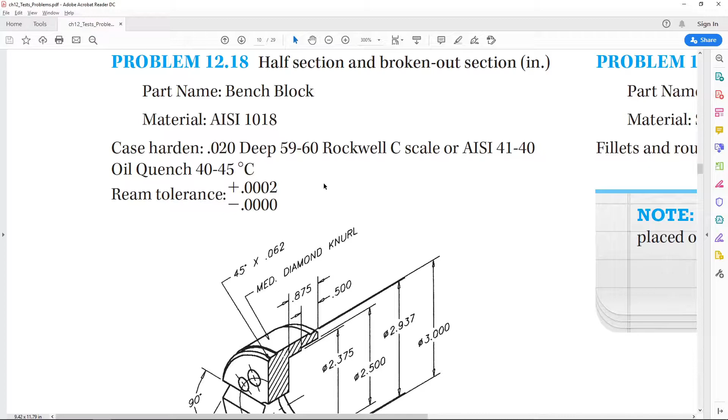For our next assignment, let's do problem 12.18, this bench block. It shows it as a half section and broken out section, but frankly, I think a half section is going to be totally fine for this.

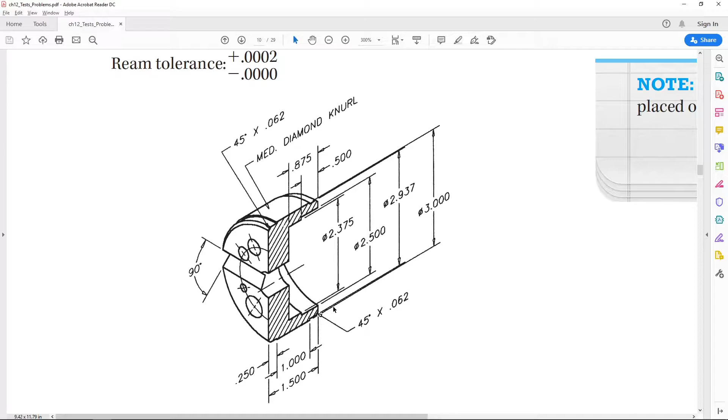So this shows you the details in two views, the front view and an isometric view. I think it'd be best, well, you can do it in 2D, or you can make this section shape and revolve it, and then cut out the holes and this 90-degree angle through the center. Here are all the holes and their diameters and the width of that 90-degree angle that's cut through the center. As far as making it goes, here it is.

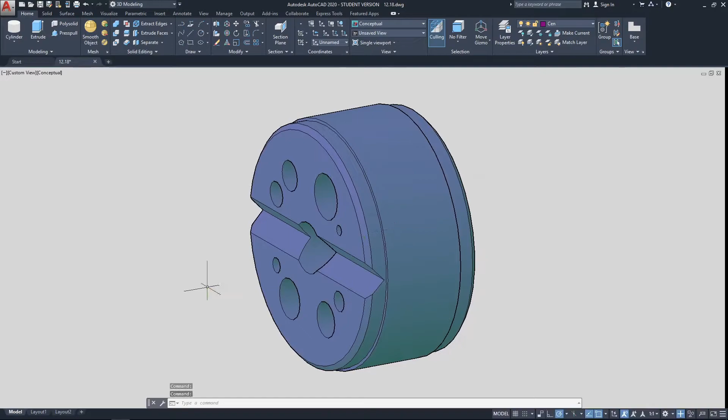I don't think it's too terribly involved, just cutting some holes through there and subtracting. So the main thing is in the layout.

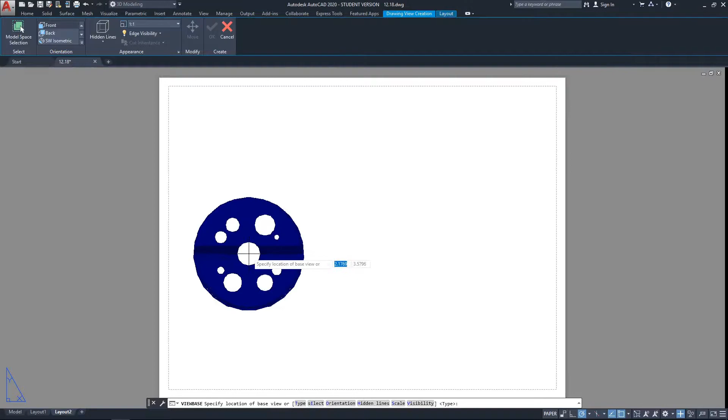Let's go ahead and add that front view here. At 1:1, it's kind of small, and also, actually, I've already changed the page size here. So originally, you'd come up with this, and I would delete the original view, and let's add this base view, and that's pretty good size.

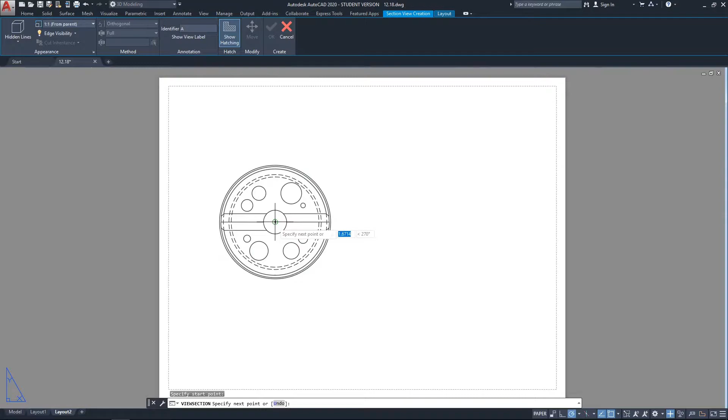Just pop that over there. Yeah, I'm going to delete that view. I just want a half section out of this. So let's select it, section half, and then draw it out to the right side, so you only get half the view being in the section.

So there's a couple issues, well, not really issues, but just to point out. Normally we'd want like one of the larger holes through, to show where that hole is through the top half of it anyway. And then we omit the hidden lines in that bottom side because, well, you're just trying to show the outside edge anyway. If you wanted to show the inside, well, then you go all the way through it.

So there are instances where you'd want to put hidden lines in there, but not today. Okay, so add your center lines and your dimensions, and that should be well enough taken care of. A couple things, go into my center layer. I'll probably need to put a center line and dimension that circle to show that all the circles are on that center, or on that diameter.

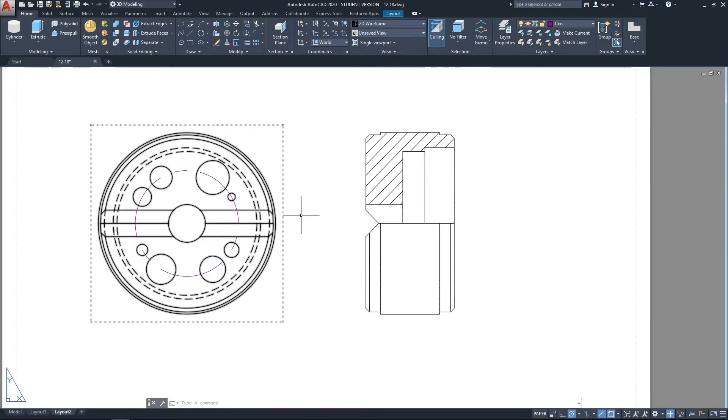Again, I don't see a good reason to use a broken out section anywhere. Everything seems to be pretty well described here and with the dimensions. One other thing, when we draw a line, we want the center lines. I can't really use the center mark tool for these circles.

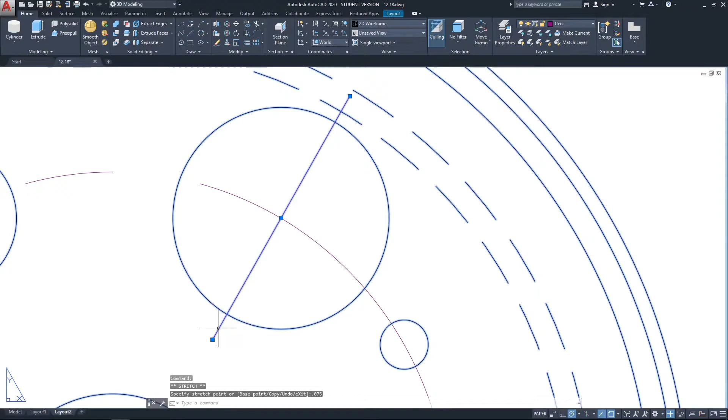So best thing to do is, I think I could get away with just drawing one and coming out. Maybe a nice even or nice easy number to remember. There, it's still not quite breaking, but I'll change my line type scale. But once I've drawn one, I should be able to mirror and rotate and do some things.

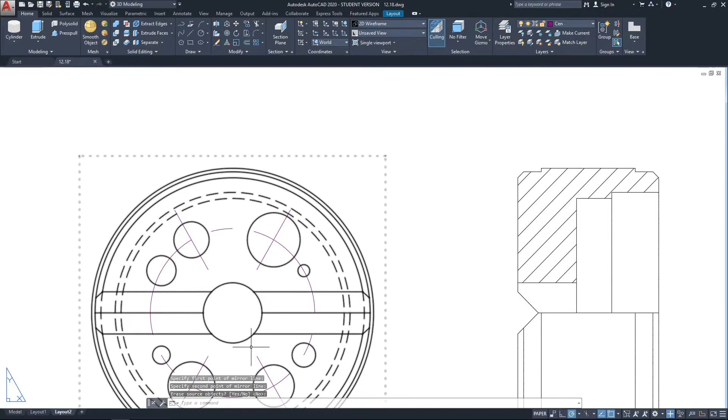Try mirroring that. Didn't quite get the tracking right on that. Let's try rotating one with a copy. And rotate it to a nice angle, once I have that one.

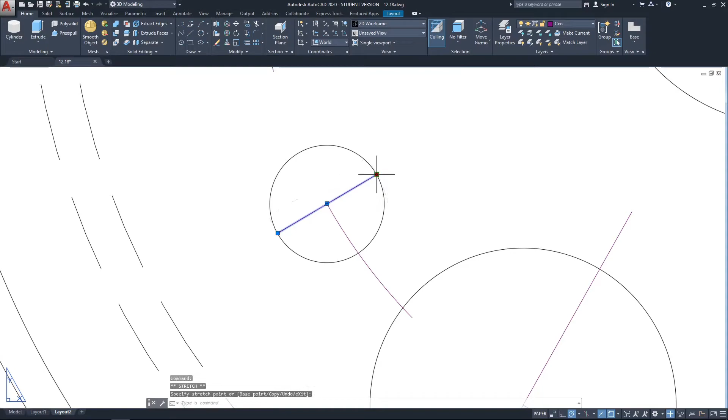These are for shorter, for the smaller holes. So I'm going to put those back, and extend them again. Probably a little more than usual, but okay. Then I'll mirror those. So I've readjusted that a little bit.

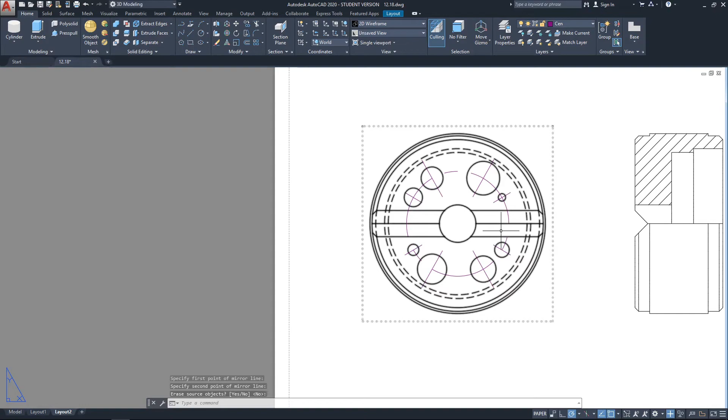Okay, got all my center lines. Let's try the line type scale here. It's a little small for these, and it's making the hidden lines too small. So instead of that, let me put my line type scale back to maybe point something. Okay, the hidden lines are looking okay, and most of these other lines are broken, but not quite.

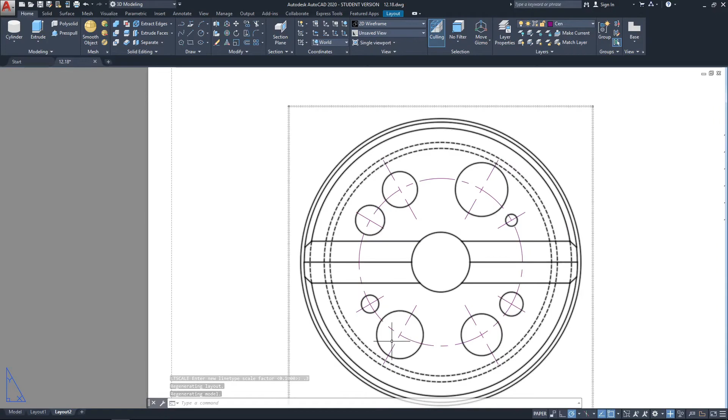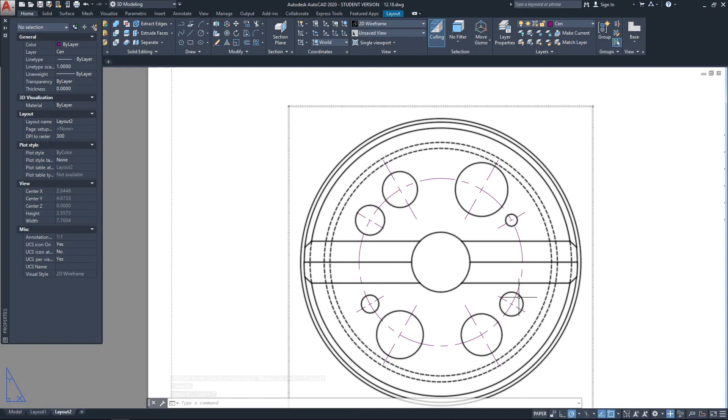So maybe on these smaller ones that aren't quite long enough to show a good line, I can go to my properties, control 1, and change its individual line type scale to maybe half of that. So those actually get multiplied to each other, the global line type scale times the local. In this case, my global line type scale is 0.3, and the local on these smaller holes is 0.5, which gives it an effective 0.15 line type scale. Okay, so add your dimensions, and that should take care of it for a half section view.